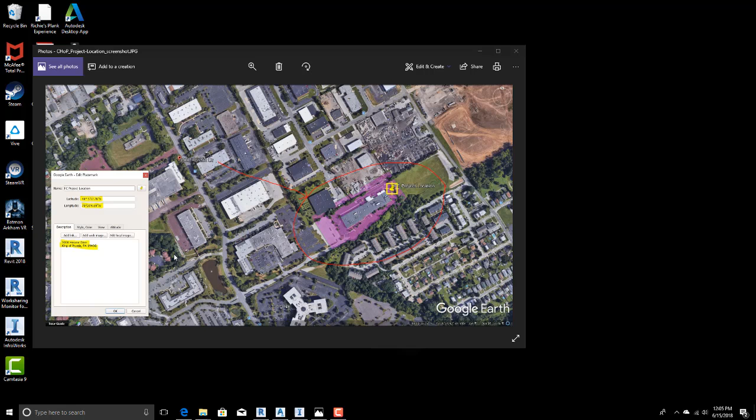I'm going to start by identifying my area of interest. We have a photo on screen that shows us that location. Project location's right here, and over to the left we can see the address of that location, 3000 Horizon Drive, King of Prussia, Pennsylvania. Once I've identified my area of interest, I'm going to bring up InfraWorks.

Using InfraWorks, I can create an existing conditions model that contains that USGS surface. To build that model, I'll click the Model Builder button, and then I can type my address here in the upper right corner. We'll type Horizon Drive, King. You see I don't have to type the entire thing there, I can just grab it from the list.

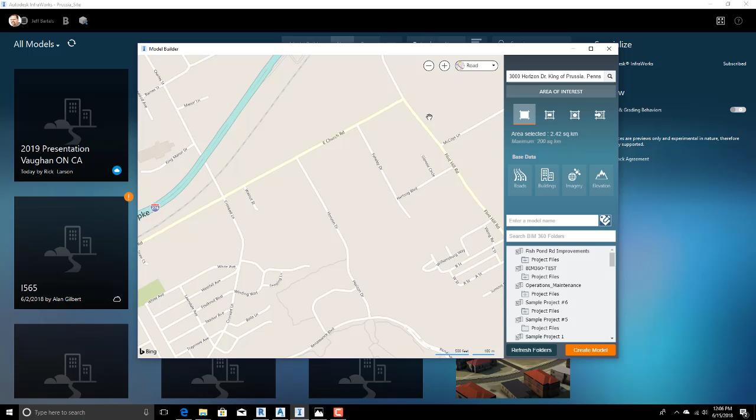This gives me a street view, although if I hover over this button in the upper right, I can get an aerial view as well. This is helpful. Let me drag this over so I can roll the wheel forward and zoom in as well. So there's our site, that's what we're interested in. I'm going to back up a little bit here.

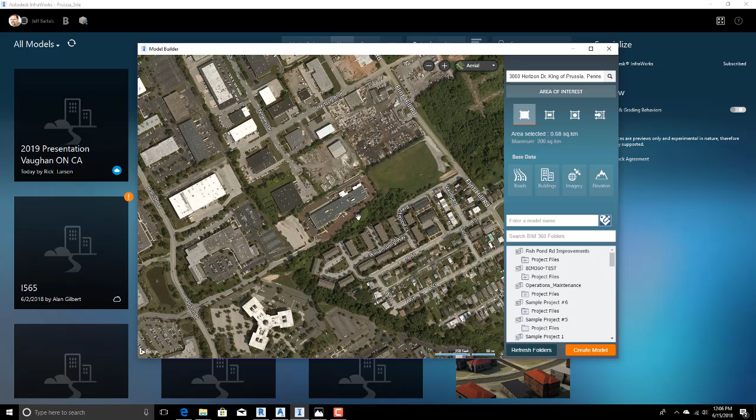To create a model from this site, I am going to use the rectangle tool, and then I will click, hold, and drag, and I'll define the rectangle. I could always edit this using the grips later. You can see I'm making a relatively small model here, 0.26 square kilometers. We can go all the way up to 200 square kilometers if we want to.

I will then give this model a name. For right now, I'm just going to call it Sample. After I give it a name, I can then select the BIM 360 project I'd like to place it in. Now, you don't have to put it in a BIM 360 project if you don't want to, you can do it locally as well. Since I'm logged in and connected to BIM 360, I'm going to select my project here.

I've got a project called PA Demo. When I select that project, it takes me to that area in the list. Basically, I'm seeing the folders that we would see in BIM 360 docs here. So inside project files, I would grab this InfraWorks model folder, and I could come down and click Create Model.

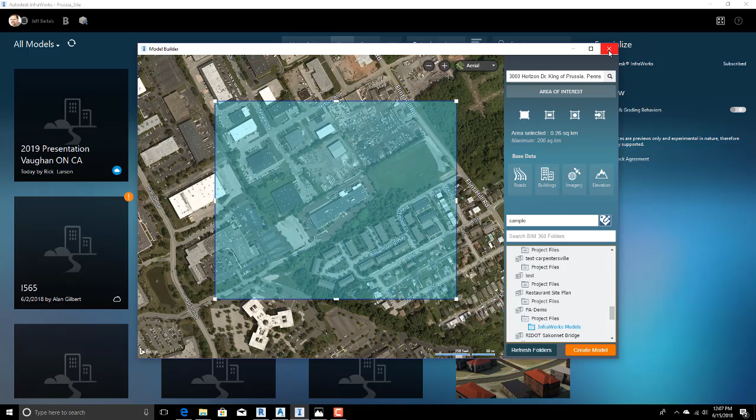InfraWorks would go out and find any freely available road information, buildings, aerial photography, and elevational data to build this model. Now, rather than clicking Create Model, I've already made one of these, so let me click the X here to close this. Basically, when the model's finished, it'll pop up here in the InfraWorks interface. You can see there's the one that I created a minute ago.

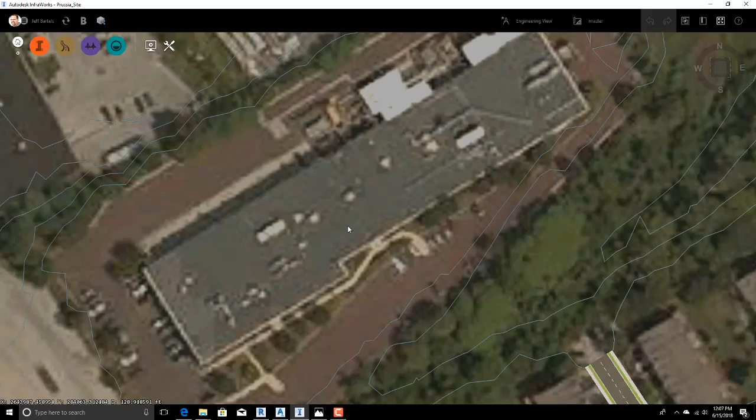So when I open this up, we can see we've got the aerial photo, we've got a surface, we've got some roads in here. If I roll forward here, we can see some of the contour information. Kind of interesting, we've got some relief there on the, looks like the north side of the site.

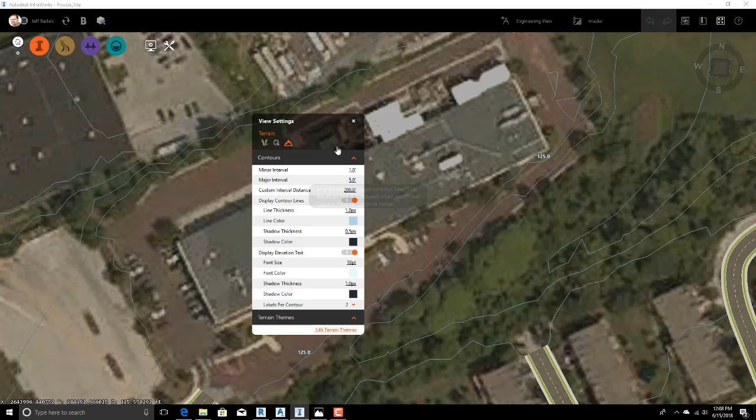A couple things. The reason I'm seeing these contours is because I'm using the engineering view. If I select that, I can change the display of the contours by clicking this gear, and then I could click this small mountain range here. Right here is where I can set my major and minor interval. I'm seeing a minor contour every 1 foot, and the index contours are every 5. We can also turn these on and off if we want to. Just wanted to show you that.

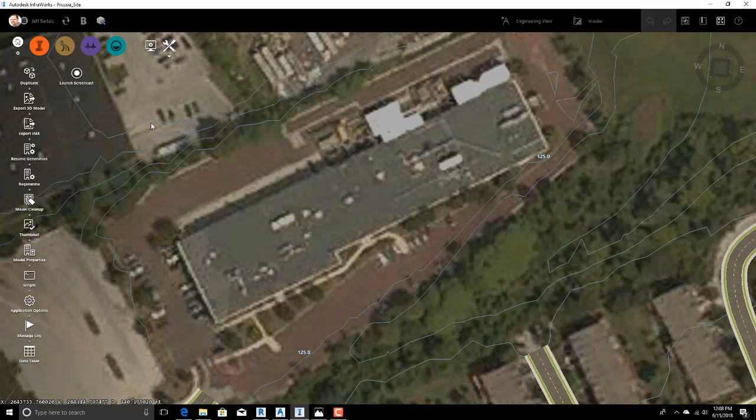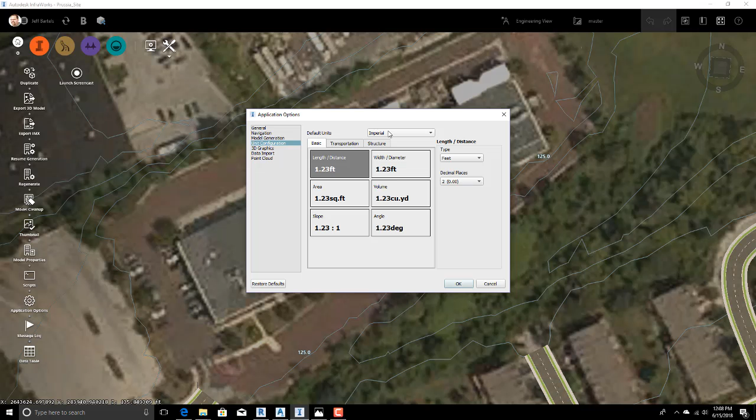One more thing, if you've just installed InfraWorks, by default sometimes it installs as metric. If I bring up the tools here, I can come down to application options, and in the dialog box we can go to unit configuration. Just want to show you right here. You can set that to imperial, and then it'll be using imperial units. So let me close this.

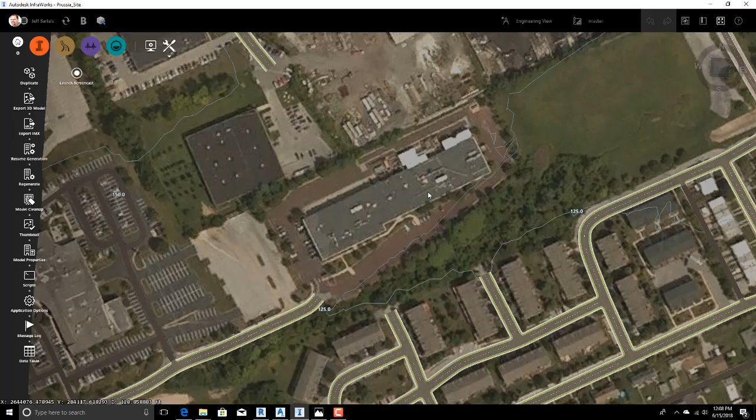All right, so I have my model. I want to create a surface from this. I've got some road information in here, you can see some of this came along for the ride. I don't need this. If I export this surface, sometimes these roads will take some liberties with the contours, it'll actually start creating contours and things that go across the roads. I just want the USGS data.

So I'm going to create a new proposal. I'll do that by selecting this master proposal up here, and I'll click Add.

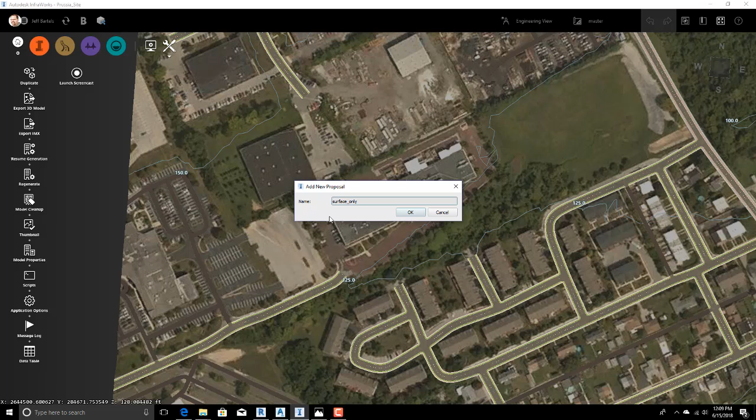A proposal is like a variation of this model. I'll just call this surface underscore only, and click OK. That essentially created a copy of this model.

From here, I'm going to click the InfraWorks button, then click this cube, and click Data Sources. This shows me the data I got from Model Builder. I don't think it looks like I got a couple of buildings in there.

I don't want these buildings. I don't want anything interfering with my surface, so I'm just going to right-click on that and choose Remove. We'll take out that feature.

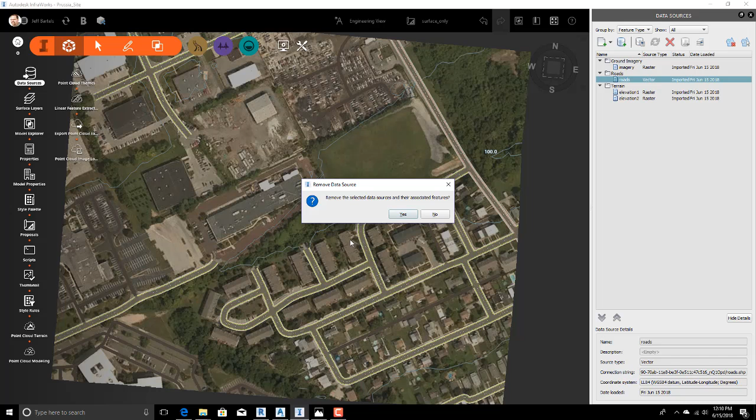Then I'm going to go to roads. I don't need these roads at all either. Let me right click and I'll choose Remove, and I'll click Yes. So that's perfect. I want to keep the image and I want to keep the terrain there. So this gives me a nice clean surface.

If I want to kind of square this up, I can click the top hotspot there on the view cube. Get that a little bit closer. All right.

Let's do one more thing. It's going to be very important when I align this in Revit. I'm going to use a coordinate system, northings, eastings, elevations. So I'm going to need to assign a coordinate system to this model. So what coordinate system should I use?

Fortunately, it's not complicated here. Let me show you what we'll do. The King of Prussia site is located in Montgomery County, so it's going to be Pennsylvania South state plane coordinate system. Let me close this.

To set a coordinate system here in InfraWorks, I'm going to click the Tools button, then come down to Model Properties. We can see that the database is stored in lat long. It'll always be that way, but I can assign a user coordinate system as well, so I can display coordinates. You can see I've already selected that state plane system. Let me show you how I did that.

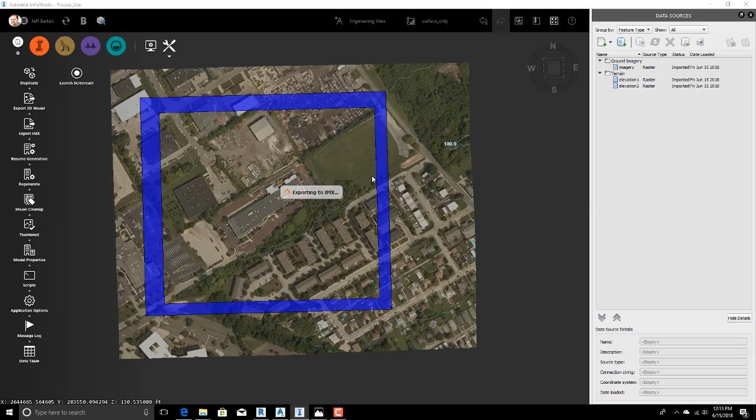Under Export, under IMX, we'll overwrite the one I made earlier. Let me go ahead and click Save, then Export, and we'll replace it. There we go. Now I have my USGS surface.

At this point, I am going to minimize InfraWorks and pull up Civil 3D. Now I've just launched Civil 3D. Fortunately, there's not a whole ton we have to do here, just a couple things. I'm going to go to the tool space, that palette over here on the left. If you're not seeing it, click this button in the Home tab—that's what turns it on and off. You can see it's blue because it's on right now.

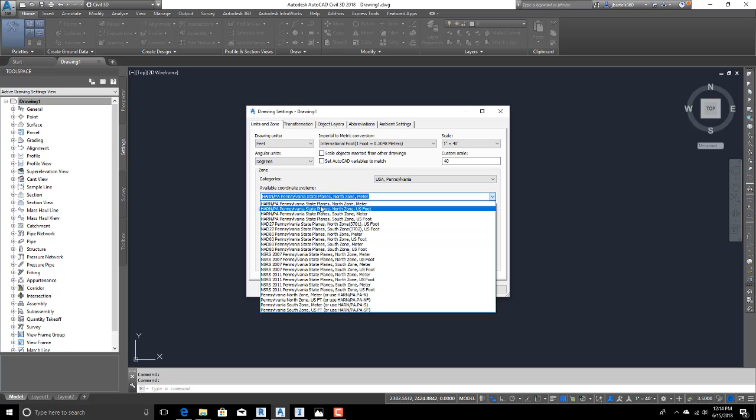I'm going to assign that coordinate system to this drawing. I'll do that by going to the Settings tab, right-clicking on the drawing name, and choosing Edit Drawing Settings. On the first tab, Units and Zone, I can select my coordinate system. I'll open this drop-down, and you'll see the same coordinate systems we had in InfraWorks. Let me come down to USA, Pennsylvania. There we go, and then go through the subset here. We'll find NAD 83, Pennsylvania State Plane, South Zone US foot. Notice the same code—if I'd written that code down, I could have just typed it here rather than navigating through these menus, so that's a shortcut. Let me click OK. So that coordinate system is now assigned to this drawing.

Let's import that IMX file now. I'll do that by typing IMX in the autocomplete, and choose IMX Import. Then I'll navigate—you can see I did this earlier—into the folder where I saved the IMX. I'll select it and click Open.

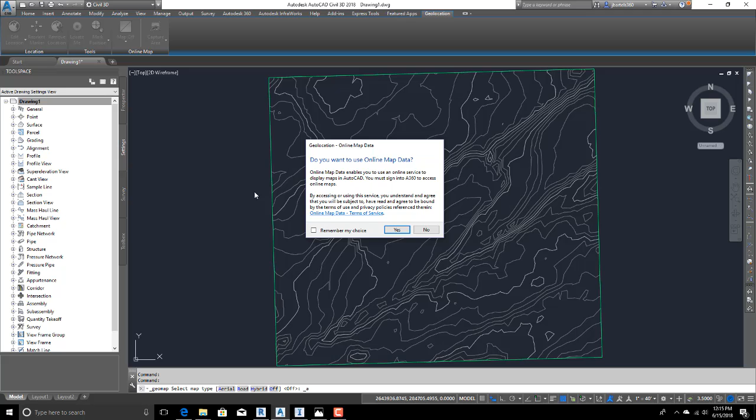There's my surface. Now that the surface is in the file, if we come up to the Geolocation tab, let me select that. I can open the online map panel and turn on that map aerial image. Since we assigned a coordinate system to this drawing and put the surface in, we're looking at a specific area, and I can now see that surface in relation to my building. So I've got both of these items together now.

Next, let's go over to Revit. I'm going to jump into Revit, go to Open, and navigate into the Revit file that was sent. You can see I just made a copy of that. I'm going to select this and say Detach from Central. I didn't have access to all the components of the project, so basically I'm creating just a copy of this project on my local machine, so I have ownership of everything to do this demonstration.

Let me also say, as I work on this, that Revit is not my first language. So as I do some things here, you may be cringing—I may be taking the long way in some cases, so I apologize for that.

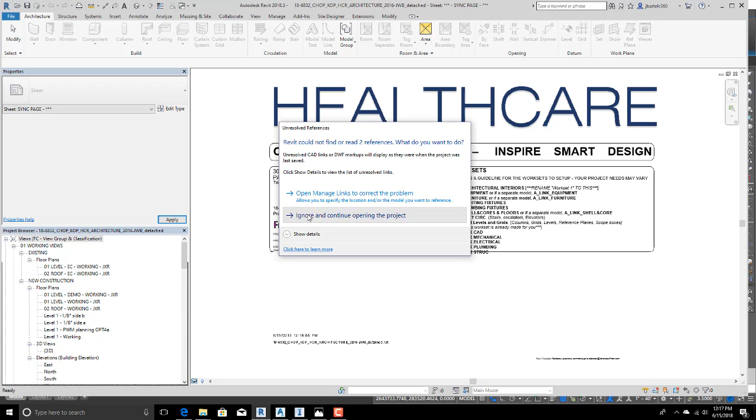I'm going to go ahead and say Ignore. There we go. I am going to go to this floor plan here. I can see this represents the first floor plan for this project. What I'd like to do is, in order to reference that surface from Civil 3D into Revit, I need to have something in common between those files. Since it looks like this is the same building we see in the Civil 3D file, I'm going to use this as my common geometry, but you can use anything you want.

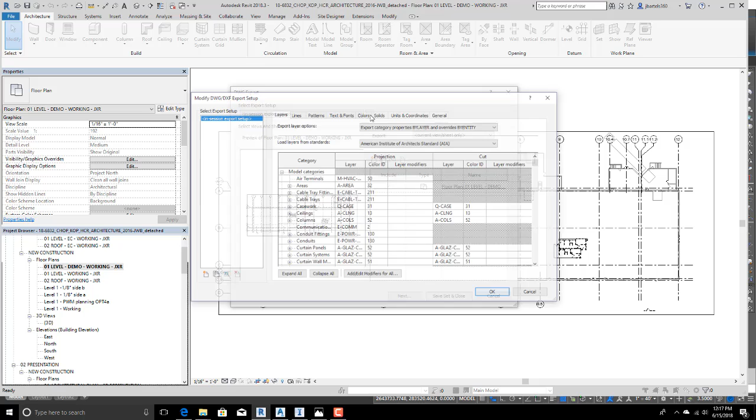Let's export this. I'm going to come up and say File, Export. I want to export this as a DWG, and let me click the three dots here. We'll go to Units and Coordinates, and I'm going to set one DWG unit equals 1 foot, because that's what the units are set to in Civil 3D, so it'll come in the right size.

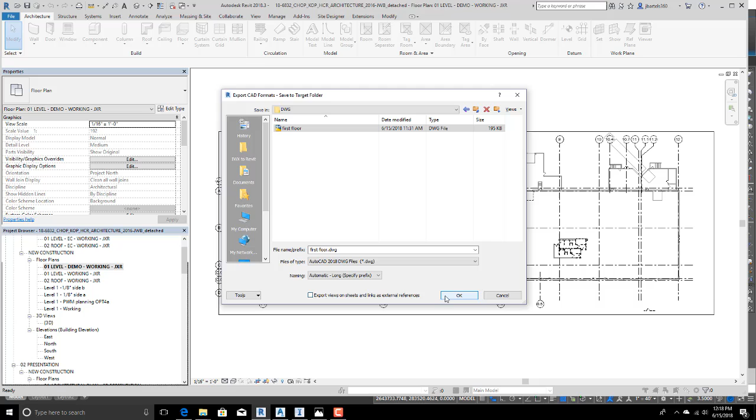I'm going to uncheck that, and click OK, and replace the one we made earlier. So basically, I'm exporting some geometry out of this Revit file as a 2D view or 2D file so I can use that to help align this later.

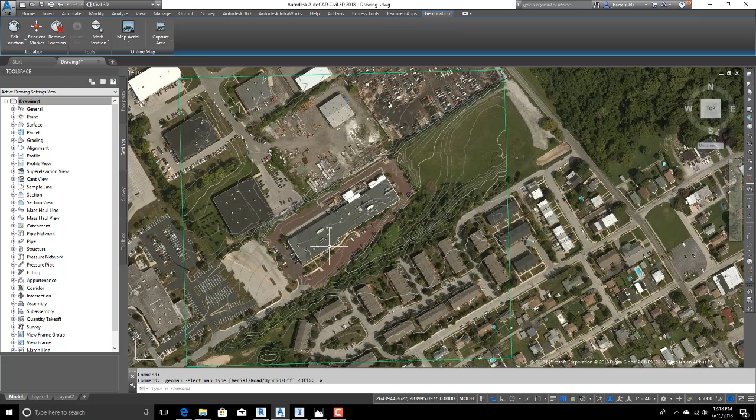So now I'm in Civil 3D. Let's externally reference that DWG file. I'll type xref, which brings up my palette. And then in the palette, I can open this menu in the upper left here, and say let's attach a DWG.

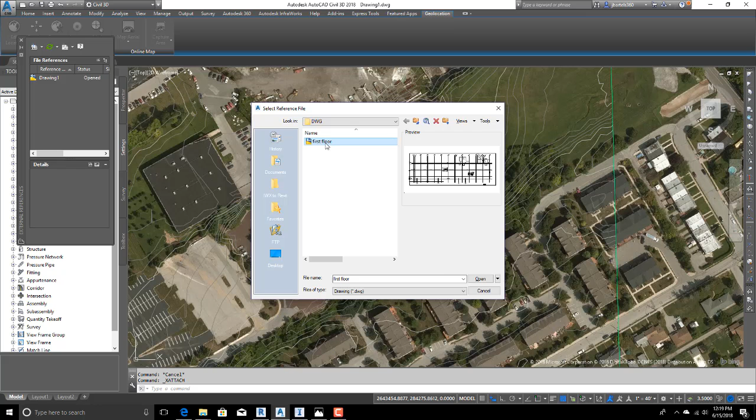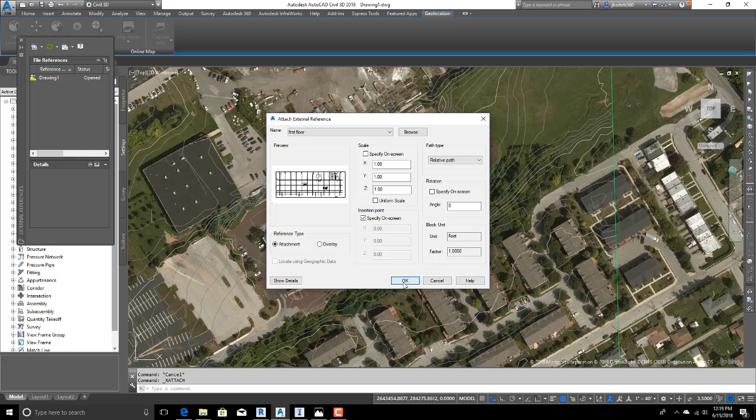I'll grab that first floor DWG file we just exported, click Open. The only box I'm going to check is insertion point, because I want to pick to place this on screen, since it's not geolocated or anything. I'll click OK, and you can see I'm holding it from my cursor. I'll just click to drop that on screen.

Now it comes in a little bit dark. That's a courtesy so you can tell the difference between your reference geometry. If I go to Insert and open my reference panel, I can turn off this XREF fading by clicking this button, which makes it a little bit brighter on screen.

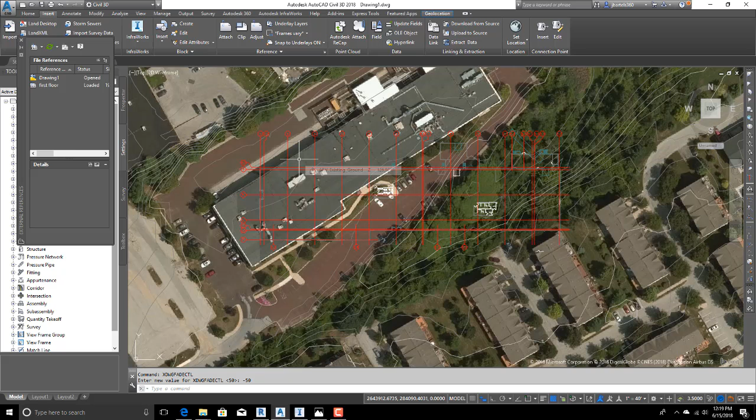So now I've got my building here, and I'm going to use this to align to this building. I'll use a command called align, A-L-I-G-N. This allows me to align one object with another. So, align - what do I want to align? I'll click this building and press Enter.

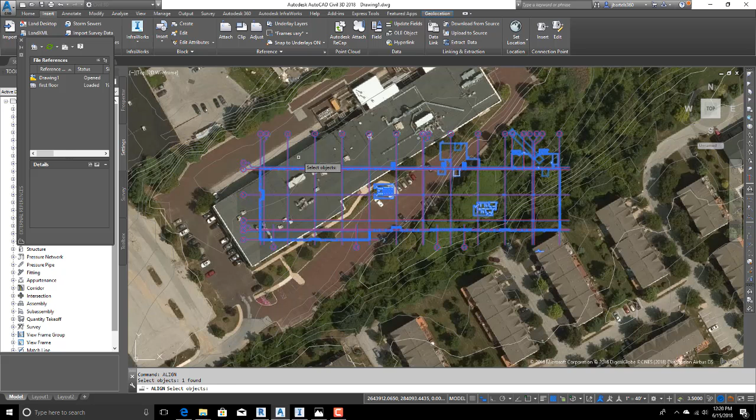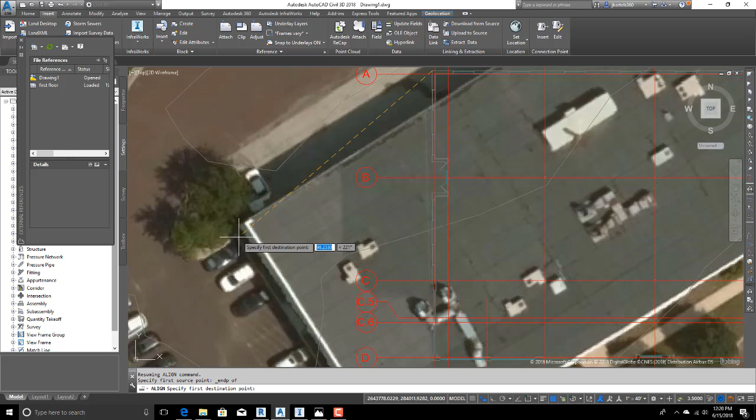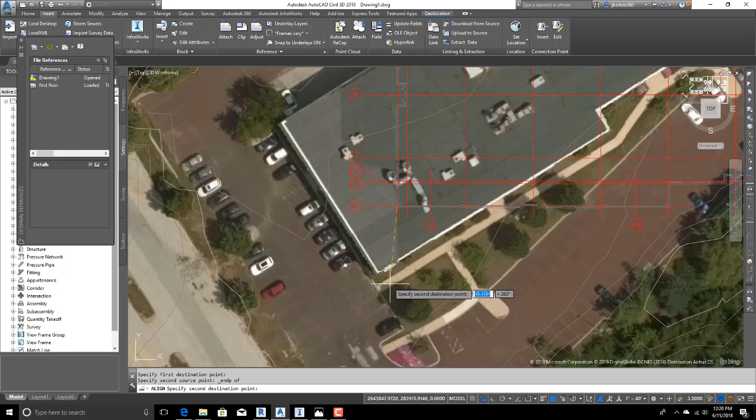For my first source point, I'll hold Shift and right-click. This brings up my Object Snap menu, and I can say I want to align this endpoint. For right now, I'll click this corner here - that's at the top of the building, so let's keep that in mind. I want to align that there. Then shift right-click, endpoint here - I wish to align to the corner there.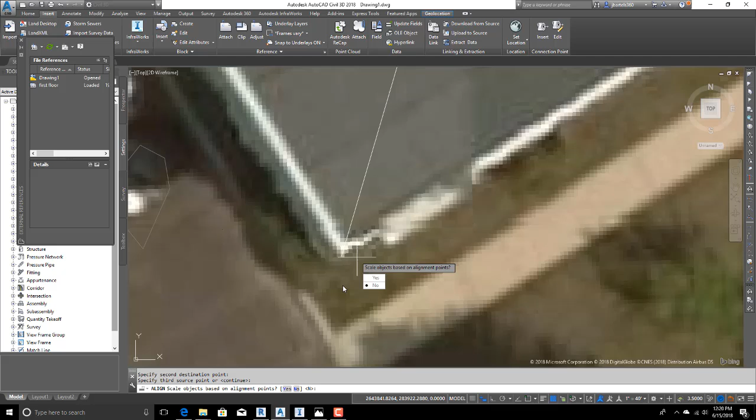I'm just picking these locations because they show up nicely in the photo. There's obviously no object snap there, so I'm just clicking as close as possible. When I'm finished, I'll hit Enter. Then, do I want to scale the object? No, that's the default. I'll hit Enter again - so that aligned the geometry to my image, but remember, we aligned it to the top of the building.

If possible, if you can align to something at ground level, that's going to be even more accurate. So what I'm going to do, since I know I'm at the top of the building, even though this is an orthographic image, there's still a little bit of distortion with things that have vertical elevation.

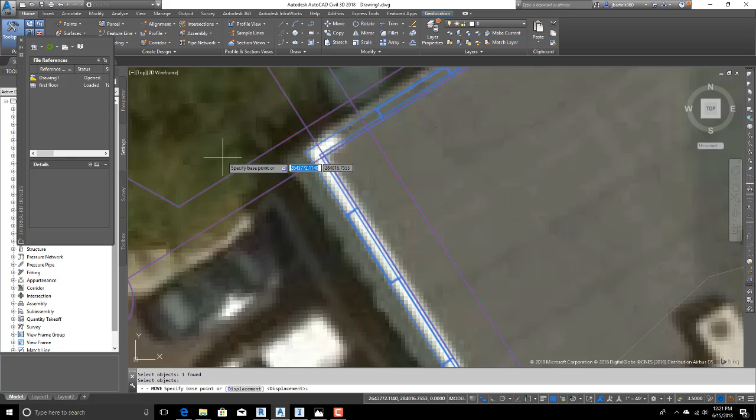I clicked Move, and I want to move this building. Enter - I don't have to pick an object snap for this. I'll just click a point on screen here. I want to move this to right there - I believe that represents the bottom of the building. Okay, oop, zoomed out too far. All right, so now my building is aligned to the base.

Here I would need to know what my first floor elevation is, because we aligned X and Y, but I need to get the Z elevation here as well. Now I don't know what the finished floor elevation is for this project.

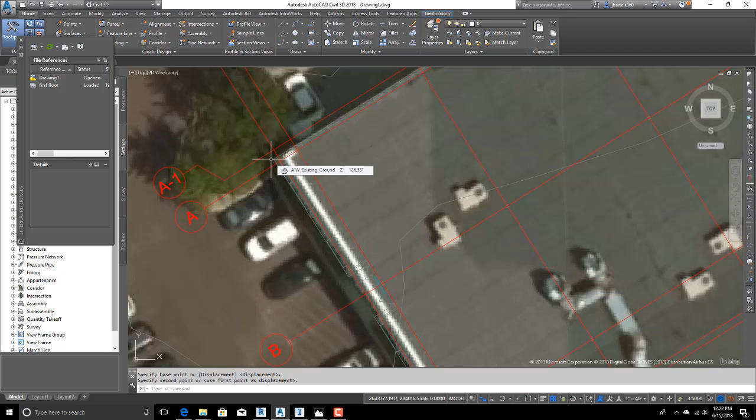If I hover my cursor, it will give me the elevation of that surface we brought in. I can see that's 126.61. If I hover close here, I can see it's about 126.53. So for the sake of argument, let's just say our finished floor elevation, or top of foundation, whatever elevation we want to go with here, is 126.5.

I'm going to grab this reference, then press Control+1 to bring up my properties palette. From here I can see my insertion Z - it was inserted at 0 elevation. I'm going to set this to 126.5, and press Enter. So now it's at that elevation.

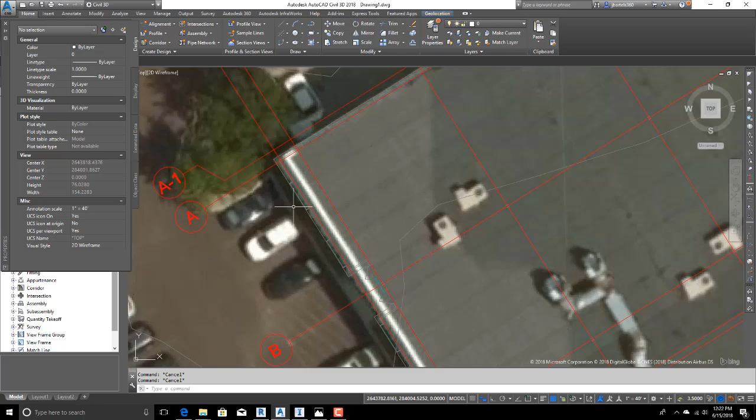So we'll assume that represents our first floor. Okay, now let me go ahead and close some of these things up here.

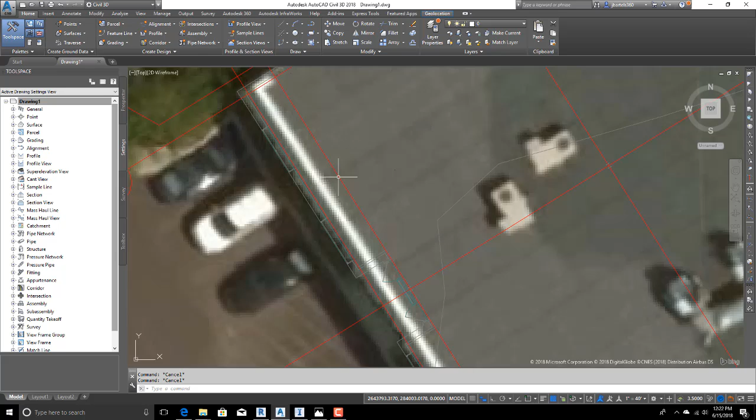I apologize, I'm having a little trouble with my mouse here.

Now that I have this in 3D alignment, there's a tool for that. If I go to the toolbox and open the Subscription Extension Manager, there's a tool called Autodesk Shared Reference Point. Here I can pick two points to synchronize with my Revit environment. The first point is essentially the origin, which is what it uses to align to, and the second point represents rotation.

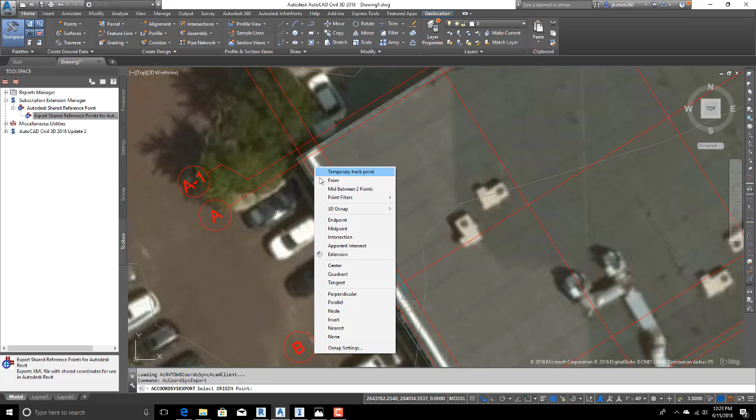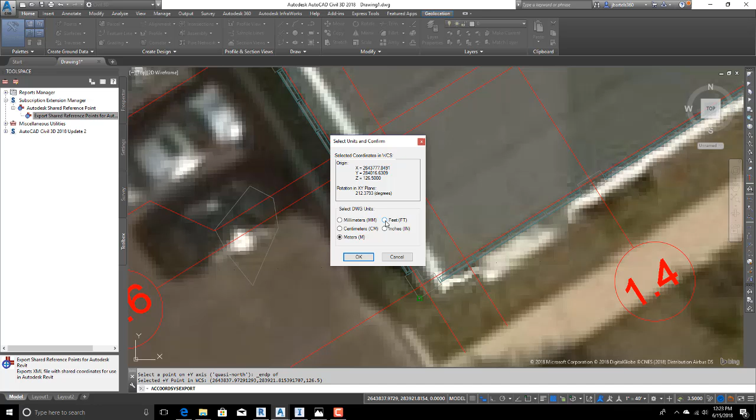I'll double click to launch this tool, and it asks for the origin point. I'll shift right-click and grab the end point right here. The next point establishes rotation, so I'll grab the end point right there. Now I can see my X, Y, and Z - the Z is at 126.5. That's the rotation. My DWG units are feet, and I'll click OK.

There's no magic here - it's exporting an XML file containing that information. You can see I've already exported one of these. In my project, I made a directory called Shared Coordinates, so we'll just overwrite that one.

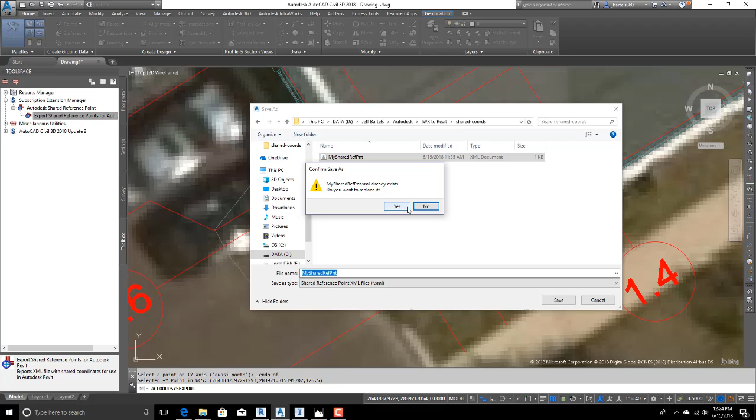Now that I have my shared coordinates, we're going to jump back over to Revit. In this environment, I can assign those coordinates. I'm going to go to Add-ins and grab Import Shared Coordinates from XML file.

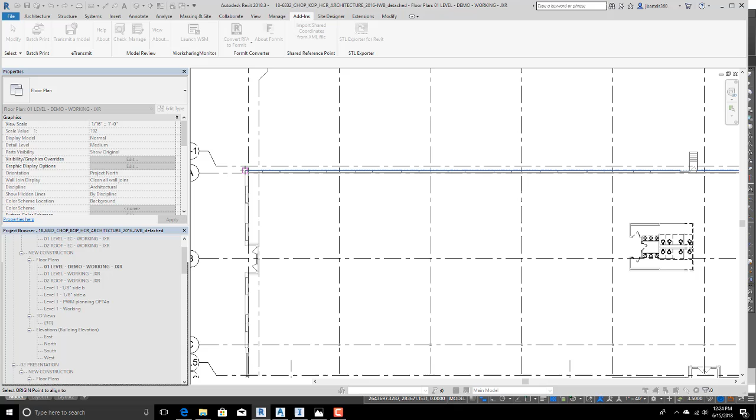Revit asks what the origin point is. Here I'll pick those same locations I picked in Civil 3D - my origin point is the end point here, and the one that determines rotation is the end point there. Then it asks which XML file to use to grab that data from. We'll grab the one we just made and click Open. Yes, I want to use that, and I'll click OK.

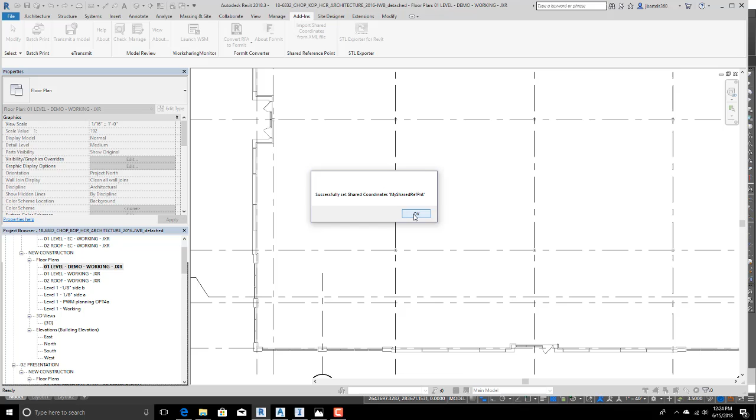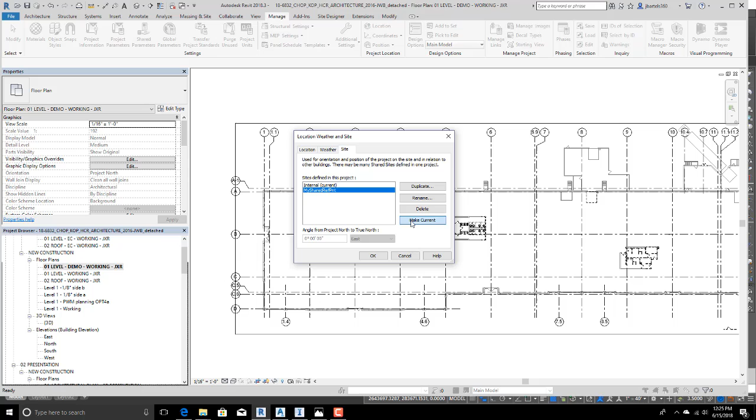Now that the shared coordinate system information has been added, I'll go to Manage and come down to Location. Here on the Site tab, I'll select my shared reference point and say make that current. I'll click OK - so I've just made that current.

The next thing I want to do, if I want to see this rotated to north, is come over and set the orientation from project north to true north. For some reason in this view I can't set that - I'm not a Revit expert here - so I'm just going to grab another view. I'll double click to flip to this view.

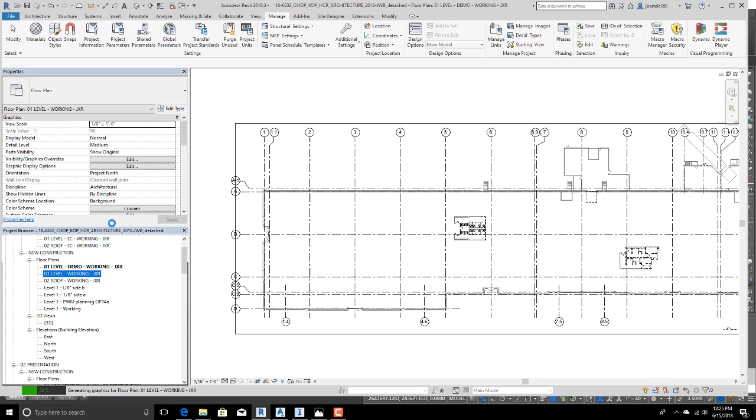In this view I have the ability to do that. Let me set that to true north, and I'll click Apply. There we go - now that is oriented the same as it is in Civil 3D.

So all we have to do now is go to Civil 3D and create the content - the contours and everything we want to bring in here to create our topography. Let's jump back over to Civil 3D.

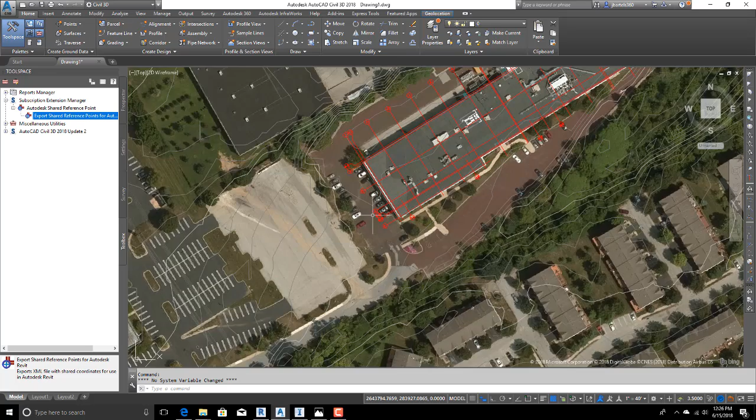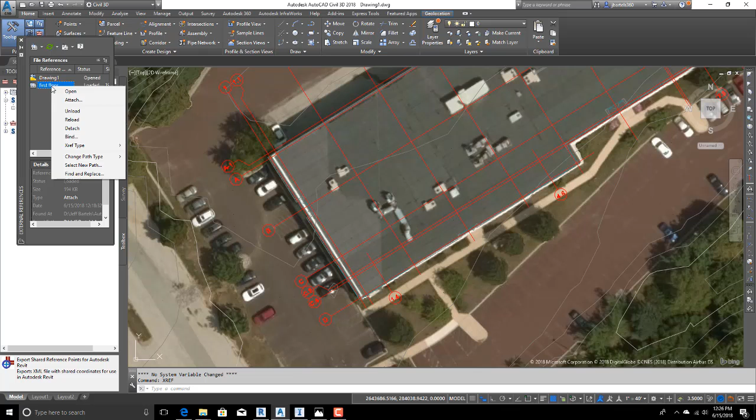At this point I don't need this reference - if you want, you can keep it in there, but I'm just going to type xref and get rid of mine. I'll right-click on this connection and say detach. Basically, I want to get everything out of this file that I don't need.

Let's do this - I'll select this surface and press Control-1 to bring my properties back up since I closed that earlier. I can see that this surface is being displayed using contours that are at a 2-foot interval.

If I open up Style here, I'm going to change this to 1 and 5 background, so I'm seeing a contour at every 1 foot of elevation. At the risk of spoiling the end of the video, I'll be exporting these contours and we'll build our surface in Revit from these contours, so I want to make sure I'm seeing as much detail as possible.

One more thing - notice this contour here. We can see the elevation if I hover, and that's at 129. So keep that elevation in mind, 129.

Okay, so this is a Civil 3D surface. I'm going to extract the contour lines from this so that we can export that as a DXF that we can put in Revit, and Revit will understand them. It won't understand the Civil 3D objects.

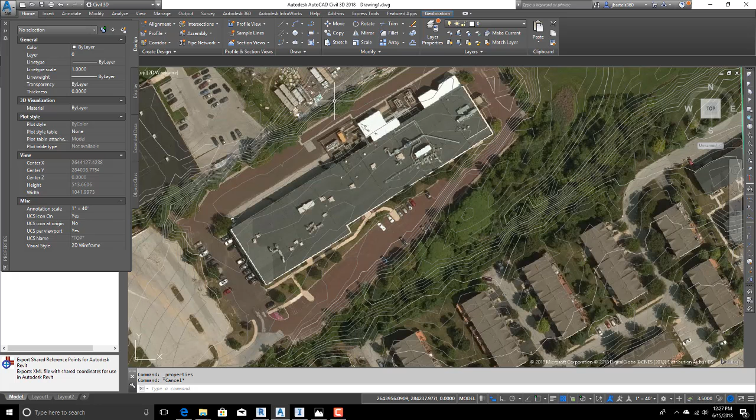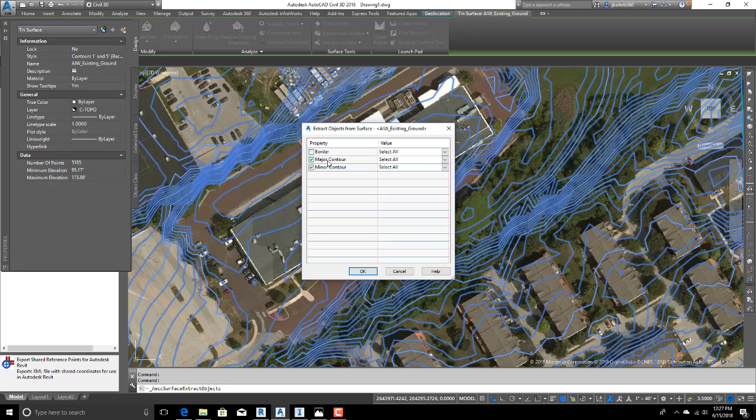So what I'm going to do, I'll just click the surface, and then I'm going to go to Extract here from the contextual ribbon, and I'll say let's extract the objects from this surface. I don't need to extract the border, but I do want to extract all the major and minor contours. I'll click OK. If I hit escape now to deselect, and if I hover, you can see how it kind of just traced these as polylines.

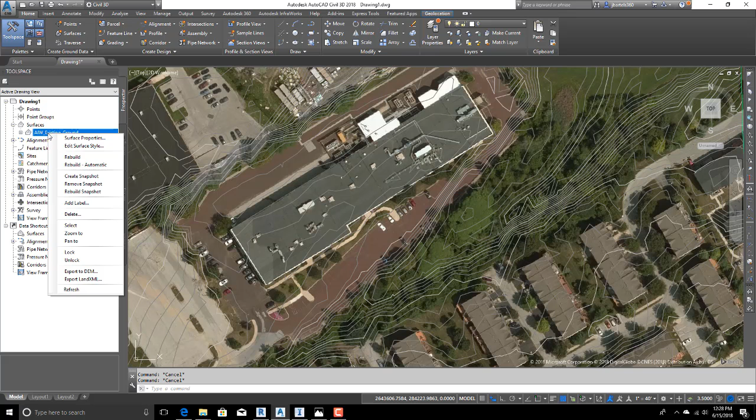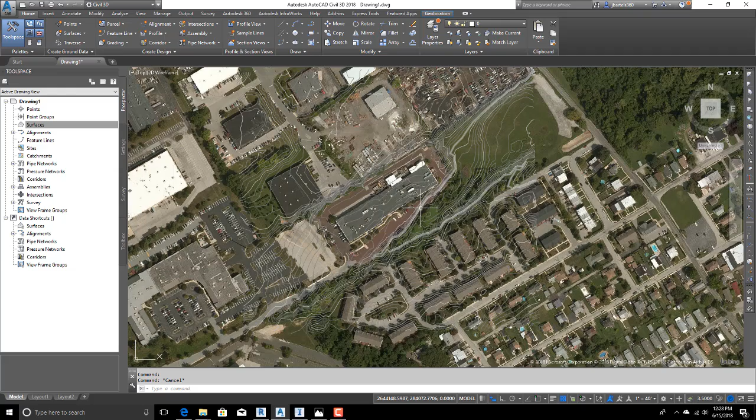So, same as before, our goal is to clean this drawing out. I've got these polylines, but I also have that surface still. Let's get rid of that surface. If I go to the Prospector tab, here's where I can see all the data that's in this file. I'm going to go to Surfaces, right-click on that surface that we brought in, and choose Delete. I don't need it anymore because I've extracted the contours from it, so I'll click Yes. There we go. So now all I'm left with is just contours.

Let's export this drawing now as a DXF. I'm going to go to the application menu here, and we'll choose Export. I'm going to export this as a DXF file, and we can do it as a 2013. Let's go to Export,

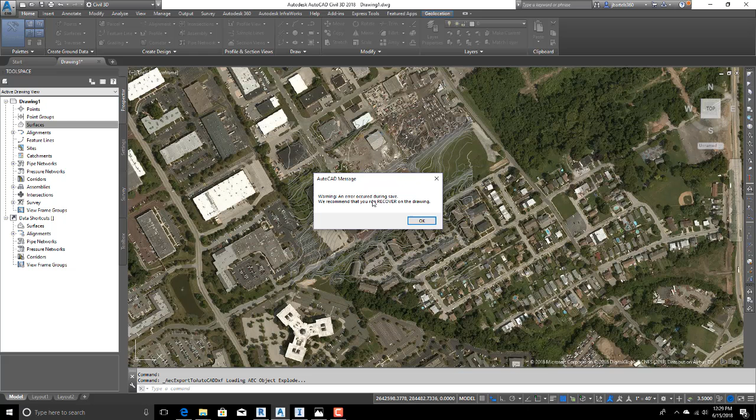DXF. Sure enough, you can see there's one that I exported earlier. I'm just going to overwrite that. Let me click Save. And I got this message before. It didn't hurt anything, I opened the DXF file and it was fine. So that's just an unnecessary warning there. Okay, so now I have the DXF file.

Let's bring this into Revit. I'm going to go to Insert, and I'll say Link CAD. And then I'm going to go into my export folder here, and I'll grab the DXF file, and that surface file. So I'm importing a DXF, and layers, go ahead and bring them all. Import units, auto detect. I unchecked this, correct lines that are slightly off axis.

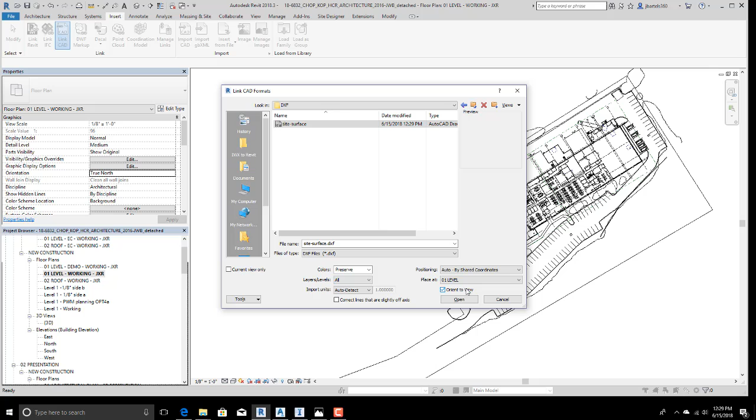I don't want to do any correction or anything because it's good the way it is. Positioning, I'm saying auto by shared coordinates, and I don't think I need to do the orient to view. Let me go ahead and click open. Host model and link do not share the same coordinate system. I am going to use the align option. This will align the link's world coordinates with this model's shared coordinates. So that's what I want to do,

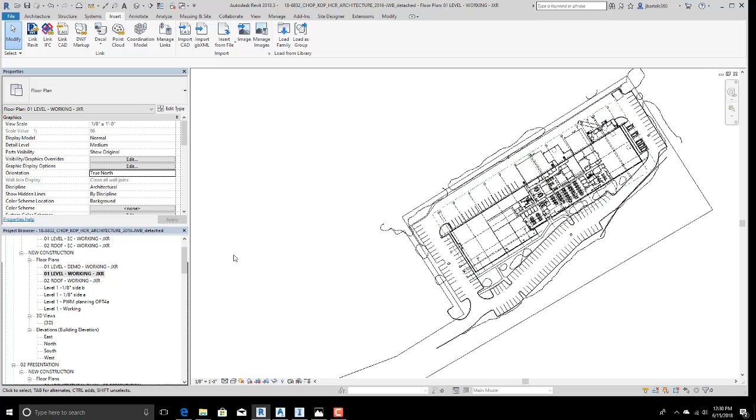and that's fine. Now it's telling me that the items aren't visible in this view. Once again, I apologize, I'm not a Revit guy, but I do know if I come down to the 3D view here, it shows up there. Now let me go to a top view for a second. I'll click the top hotspot here. So we can see that that lines up.

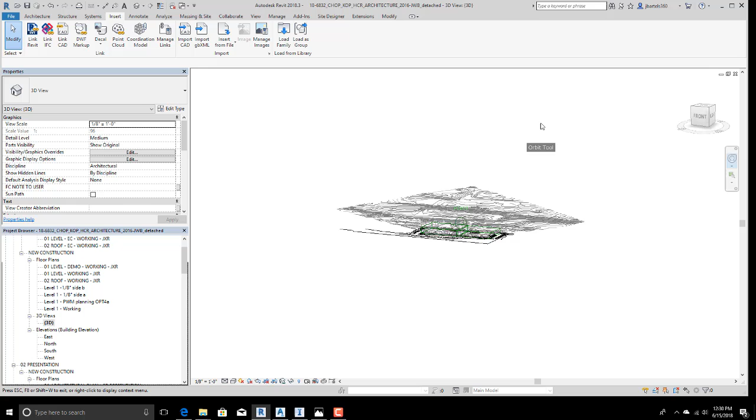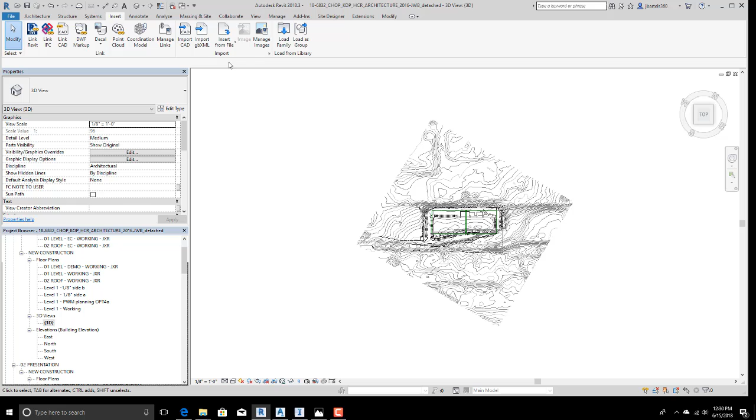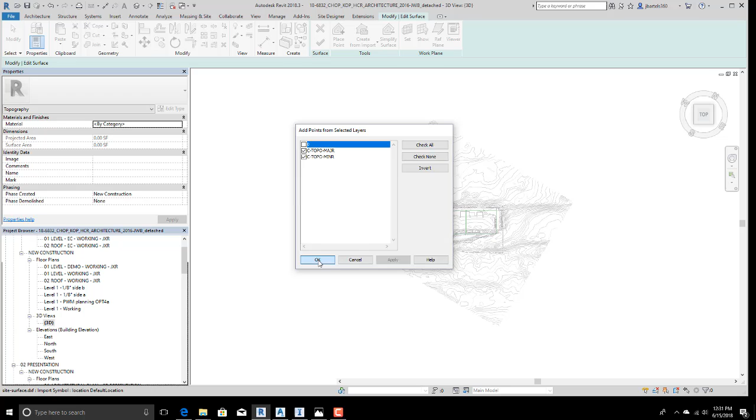I'm going to go to Massing and Site, and I'll choose Topo Surface. And I'd like to create from Import. I'll choose Select Import Instance, and I will select this. I want to build that topography from the content that's just on those two layers, the major and minor contours. That's all that's in that file. I'll click OK. And it'll go through and grab points for all those locations. Then I can go ahead and click the green check here because my surface has been created.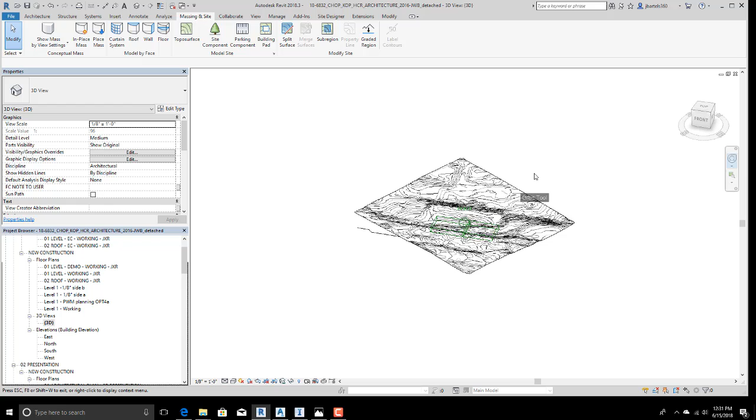Now, let me go back to Orbit here for a second. And I'll tip this up. So there's my surface. Now, what I'm using to check here, if I zoom in, remember when I showed you the contour that was right here? Remember the elevation on that was 129?

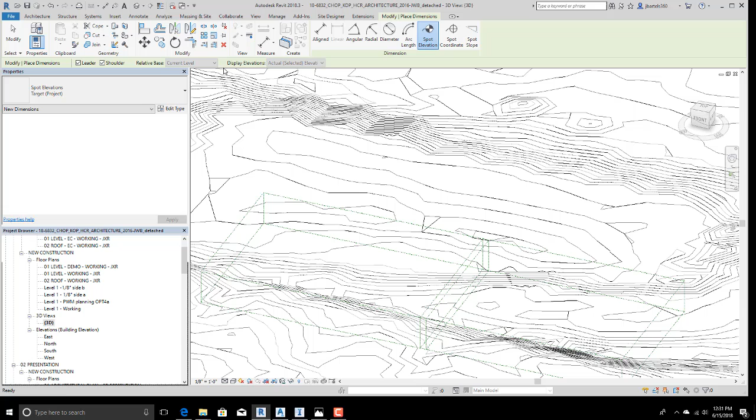That was 129. If I go to Annotate, Spot Elevation, if I get in here, we can see that that is at 129. So that tells me, at least based on my limited knowledge of Revit, I've got the surface in the right location, and the surface is at the appropriate elevation.

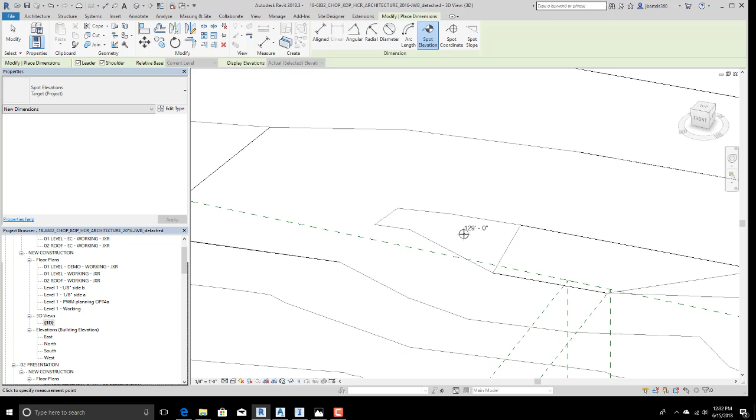So I'm hoping that by looking at this, I've gotten you 99% of the way to where you want to be. If you have any questions or difficulties at all, please let me know. And once again, I hope this was helpful. Thank you.